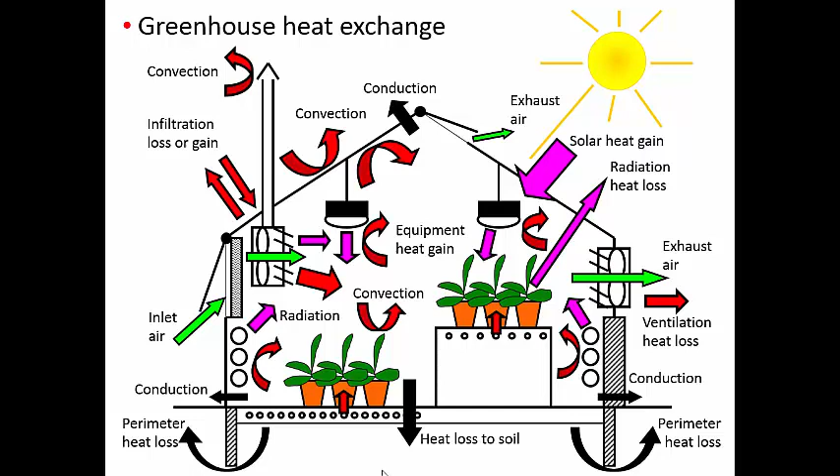So the crux of the matter is, how do we calculate how much heat a greenhouse is losing, because we want to calculate what the capacity should be of the heating system that can make up for that heat loss. We do that through different steps. We have to calculate the structural heat loss, a combination of conduction and convection heat loss, so structural heat loss to the structural elements, as well as air movement happening in and outside the greenhouse that carries heat away from the structure.

We have infiltration heat loss, which is part of air movement, typically through unintended cracks and openings. We saw a lot of those in the greenhouse today, especially around ventilation windows, doors, and things like that. Sometimes we see them in the glazing material, particularly in older greenhouses made of smaller panes of glass that are lapped. Sometimes those panes of glass slip and you get cracks that allow air movement, and with that air movement we can lose heat, so we need to take that into consideration.

The third step is to look at the perimeter heat loss. That's heat loss occurring along the bottom perimeter of a greenhouse, where the warm floor or warm soil is typically in direct contact with the very cold ground soil outside. If we don't have a barrier there, we can lose a fair amount of heat to the outside.

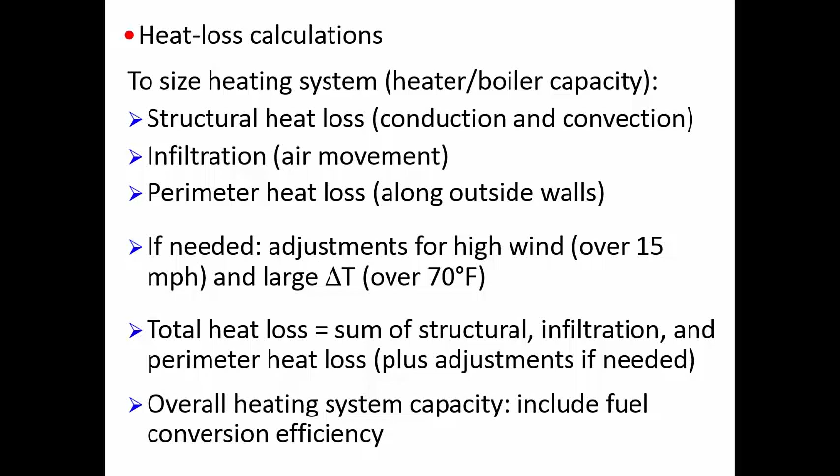The first step is the structural heat loss, what we lose through the structure. That is typically mostly the covering material for a greenhouse, but it could also be some structural components. Here you see the equation for that—it's a fairly simple equation.

We need to know something about the material involved and how well it conducts heat. We call that the heat transfer coefficient, or the U value, which is the inverse of the R value. So if you go to a box store like Lowe's or Home Depot and look for insulation material, you'll typically find an R value. The U value we use for our calculation is nothing more than the inverse of that R value.

We need to know the surface area associated with that particular material, and if we have multiple materials—for example, a greenhouse covered with double poly as well as some areas covered with polycarbonate or another rigid plastic material—we need to calculate the area involved as well as the associated U value for each of those individual areas.

We also need to know something about the temperature difference. We typically use the nighttime set point temperature for the inside temperature, because nighttime is typically when we expect the largest heat loss, since it's coldest outside. It doesn't have to be that way—it could be a very cold day during the daytime—but typically nighttime is the coldest time, so for the inside temperature we pick the nighttime temperature set point.

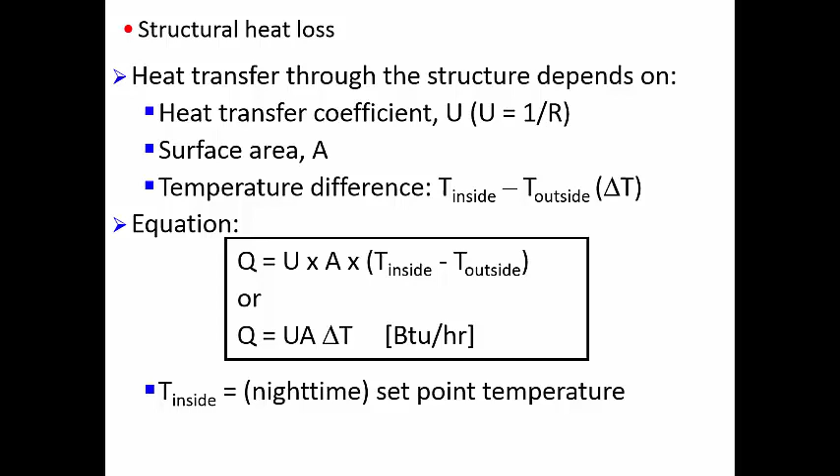Now we set the inside temperature, typically our nighttime temperature set point. The U value is something we can get from materials. Once we know the materials involved for the cladding material and sometimes for the structural components, we can figure out the U value by looking at manufacturer's data or by going to an engineering table.

We can calculate the area of the particular structural component involved by looking at the plans, for example the greenhouse, or by taking measurements. We can figure out what the grower is using for their inside nighttime temperature set point. The only thing we don't know yet is the outdoor temperature.

As I mentioned, we use a sort of compromise called the outdoor design temperature. These are values calculated for many locations across the country. One of the handouts gives you a table for many locations that gives you this 99% design temperature. What that means is that this particular temperature we use for our calculations is only exceeded, or only lower than that temperature, 1% of the time.

So when you take temperature readings for particular locations over a long period of time, you can calculate what that particular temperature should be that is only exceeded 1% of the time. We call it our 99% design temperature.

The reason we do that is if we went with the absolute coldest temperature ever recorded for a particular location, we'd have to design for a very large boiler system, and that capacity would only be used a very limited number of hours over an average year. So we back off a little bit. We say, can we live with a somewhat smaller heating system that is not as expensive and is perhaps used more efficiently than that very large system we'd need for the coldest temperatures ever recorded for this site?

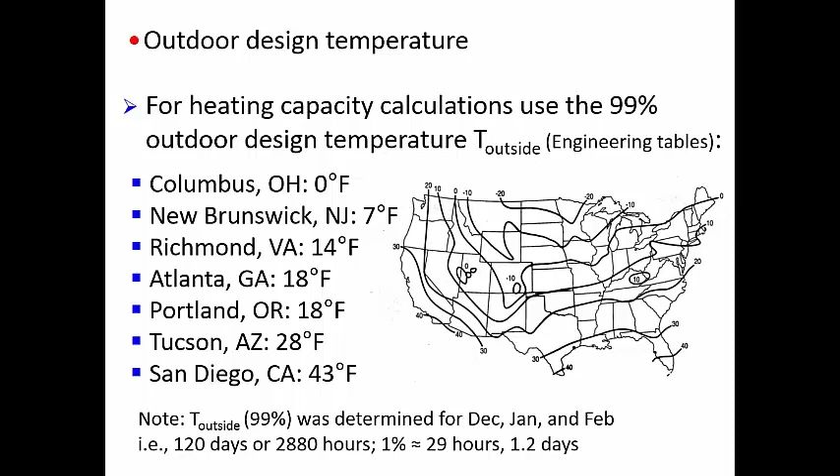The next thing we need to know are the U values. I said you can go to engineering tables or manufacturer's data. In this table you have information about the most common values for the most common materials we use for greenhouse covering materials.

Single or double glass, single or double polyethylene film, double or sometimes triple layer rigid plastic panels, acrylic or polycarbonate - you can see the values. You can also see what happens when you add an energy curtain: the value drops significantly. I want to re-emphasize, and I'll come back to this later, that adding an energy curtain is typically a very smart decision for a grower. I also included some other common building materials to get an idea how that U value compares to these other structural components.

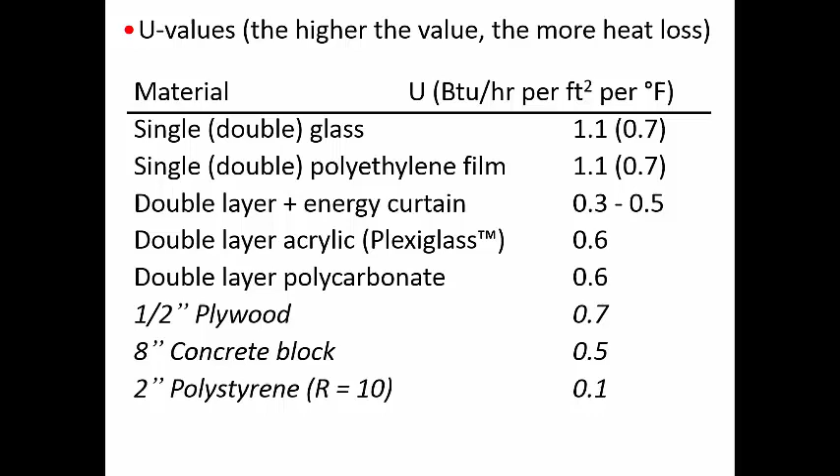So the thing to remember is that if you double the layer, whether glass or polyethylene film, you see the number in parentheses drop significantly, and the lower U value means less heat loss to the outside, so it's a better situation. You can also see what happens when you add the energy curtain - another significant drop in the U value.

So we've dealt with the structural heat loss. The next thing we need to worry about is the infiltration heat loss - air movement through unintended cracks and openings in the structure by which we can lose heat. We need to follow a pretty simple equation that includes the greenhouse volume.

We have to do some calculations or use the design of the greenhouse, the plans for the greenhouse, to come up with a number. We need to look at the table at the bottom of the slide to figure out what, on average, this number of air exchanges is occurring as a result of unintended infiltration. Depending on the glazing material you use, and whether the greenhouse structure is in good or poor condition, you can find numbers here that you can plug into the equation at the top to figure out the infiltration heat loss.

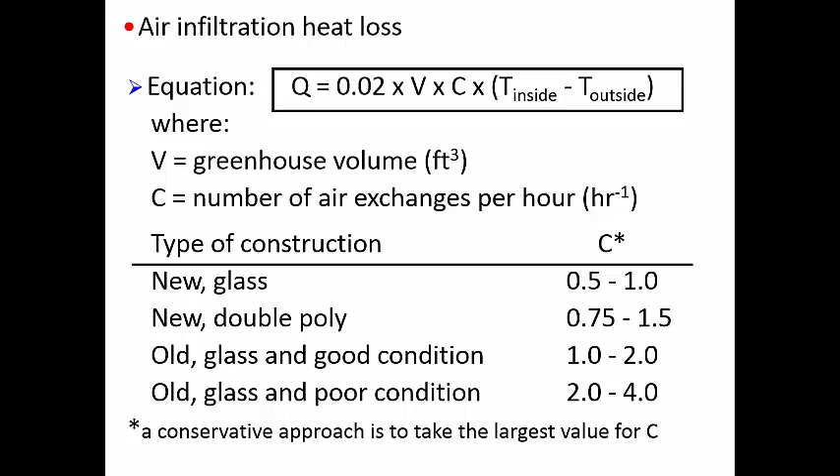When you do the design approach, it's typically a good idea to follow a conservative method, meaning you take a larger value for this number of air exchanges occurring as a result of infiltration through unintended openings. You'll get a slightly larger heat loss that helps you design a more robust system.

So we typically put the louvers on the inside for maximum efficiency. But as you know, these louvers are typically made out of aluminum or fairly flimsy sheet metal, and over time they don't close very well anymore - they get dented and have little openings. So think about the infiltration heat loss that's occurring.

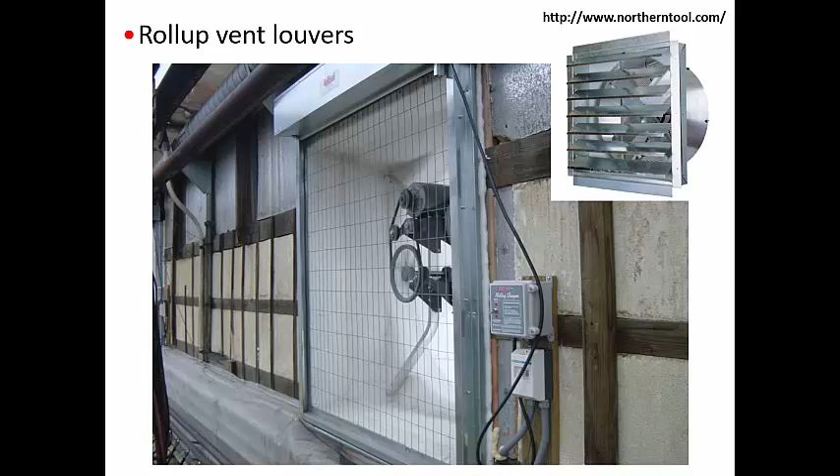One of the questions that people sometimes ask me is, if you are concerned about perimeter heat loss, what about the heat loss to the soil underneath the greenhouse floor? We've done some research on that, and we've pretty much convinced ourselves that if you are located on a site where you have a relatively high groundwater table, which typically means the soil is relatively wet underneath the greenhouse floor, then you have an opportunity for a lot of heat conduction, because water is a very good conductor of heat. So in situations where the soil underneath the greenhouse is relatively wet, you could lose significant amounts of heat to the soil.

In that case, it makes sense to also think about an entire horizontal layer of insulation underneath your floor. But if you are located, for example, on a hillside where you don't worry too much about groundwater, the groundwater table is very low at your site, and you have a well-draining soil, so that the soil underneath the floor is dry, then that soil will not conduct heat very easily. I think you don't have to worry too much about adding an extra horizontal layer of insulation underneath your floor.

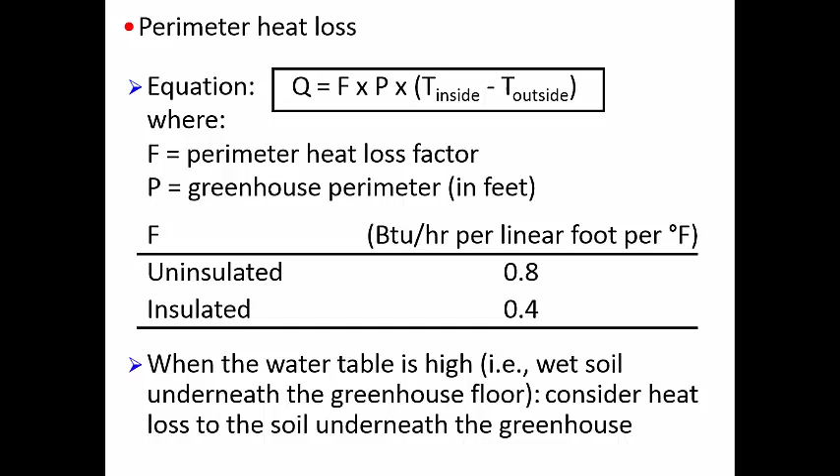In the wintertime, the outside soil is exposed to the outside conditions and could get very cold. So there could be a very easy conduit for heat to be conducted from the inside to the outside, or transported from the inside to the outside. By putting this vertical barrier, we can prevent some of the heat loss, and we reduce the perimeter heat loss of the structure.

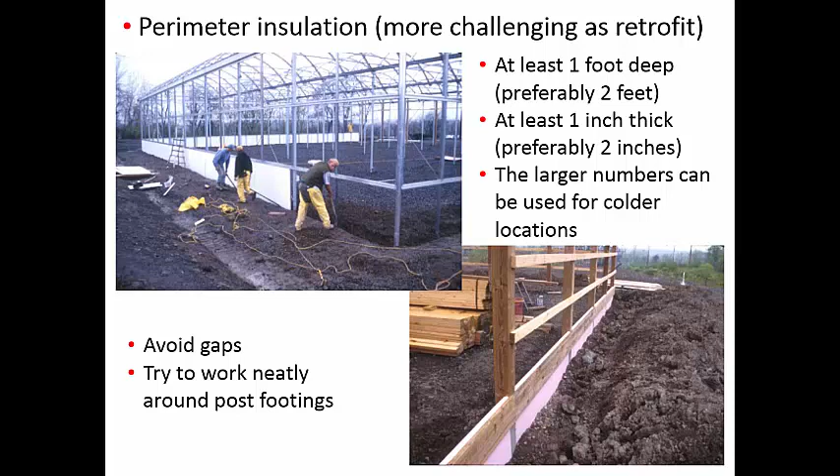Another relatively easy, and I thought innovative, approach for trying to reduce some of the heat loss from the structure was from a grower that I visited in Connecticut a couple of years ago. In the early energy crisis, greenhouses were, of course, hard hit by the high energy costs. This was in the 70s. At that time, all kinds of research was going on to try to figure out how we could insulate greenhouses. What they did at that time was recommend that people, particularly on the north wall, put some solid insulation to try to reduce heat loss.

But when they did that, they discovered that as a result, a significant amount of light was also blocked off. Think about cloudy weather like today, where light is mostly diffused, coming from multiple directions, not just from the south or from the direction of the sun, but also from the north side, because of all the bouncing around of light in the atmosphere and in the clouds before it reaches the surface. It is important to also have light coming through your north wall.

So this grower married these two ideas and said, okay, I want to insulate my north wall, but I also want to make sure I get enough light in. So they used bubble wrap material to insulate the north-facing wall of the greenhouse to try to reduce heat loss. I thought it was an interesting idea.

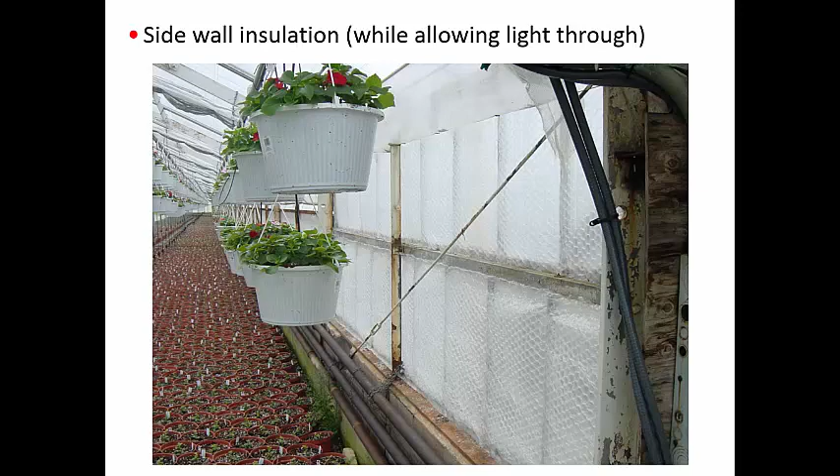This average wind speed is something you may be able to get by contacting the local weather station, or again by looking at an engineering table for a particular site that tells you what the average wind speed for that location will be.

It's probably easiest to go directly to the example. Here the temperature difference is actually 80 degrees, and 70 was the cutoff, so it's higher than that. For every 5 degrees above 70, we need to add a factor of 0.08. We are 10 degrees above 70 when we have a temperature difference of 80, so the factor becomes 1.16.

It's a multiplication factor. Same for this example where we had a wind velocity of 25 miles per hour. For every 5 miles per hour over 15 miles per hour, we have another conversion factor component. That adds up to 25 miles per hour, which is 10 miles over the limit, so you have to double the factor. You end up with a number of 1.08. If you add them together, you get a factor of 1.24.

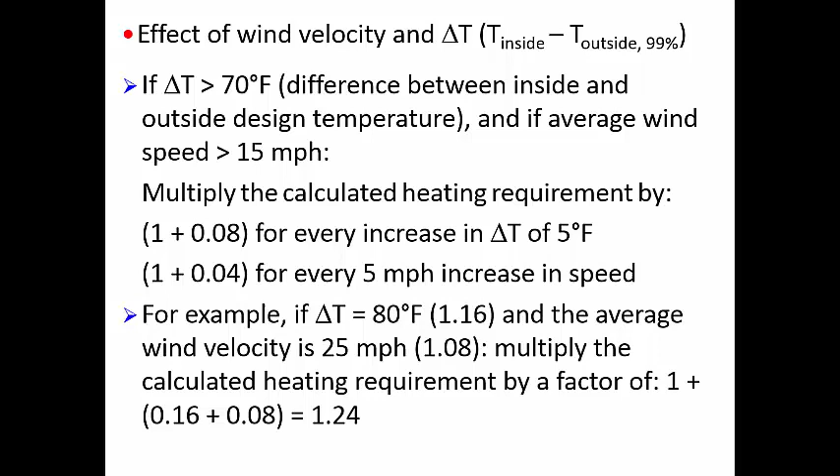This is the multiplication factor that you have to use for your overall heat loss calculation to accommodate the situation of a very large temperature difference as well as a high wind condition. So you do all the calculation I showed you before, then figure out this multiplication factor, multiply your answer by it, and you get a bigger number that you then use for figuring out your boiler capacity, or your heater capacity.

Quick question on that: does that assume that the greenhouse is sealed up well? Yes.

You can see that for electricity, the conversion efficiency is very high. If you use electricity for heating, pretty much all the electric energy you provide is converted into heat energy, with very little loss. So from that point of view, using electricity is a very good thing to do. But of course, electricity is a very expensive way of heating a structure.

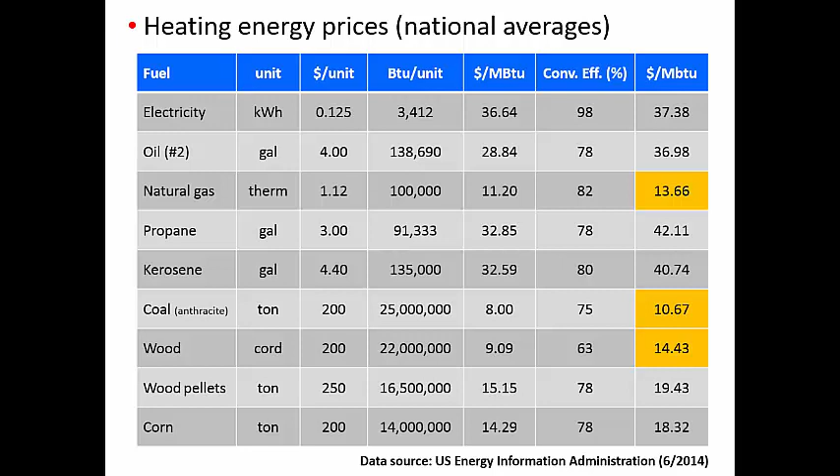Now, some of you may pick a bone with me and say, well, my gas heater is a lot more efficient than 82%, and that's fine. You can use your own conversion efficiency numbers for your own system. That 82% I think is a reasonable number for an average gas-fired heating system. So depending on your own numbers and your own prices, you can do the same kind of calculation to figure out for your situation what these numbers will be.

So next I wanted to review some different heating systems. We've seen unit heaters, so I think you all know what they are, what they look like, how they work. It's basically a heat exchanger with a fan, and we provide fuel. It could be gas, could be oil, it could be something else that is combusted inside, and then we blow warm air through the unit, and the heat exchanger exchanges the combustion heat with the air that we blow through the system.

Sometimes we are concerned about byproducts that are formed through the combustion process, and in that case we have what we call separated combustion systems, where we bring in outside air for the combustion process and we remove any combusted air or combustion products through a different stack system to the outside, so that the inside air is never mixed with the combustion process. There's no release of any combustion gases inside the greenhouse.

Sometimes we do want combustion processes inside the greenhouse when we want to release CO2 in the greenhouse for added photosynthesis, added growth. We also have these type of furnaces, but just like unit heaters, furnaces have a particular challenge in distributing that air uniformly throughout the structure.

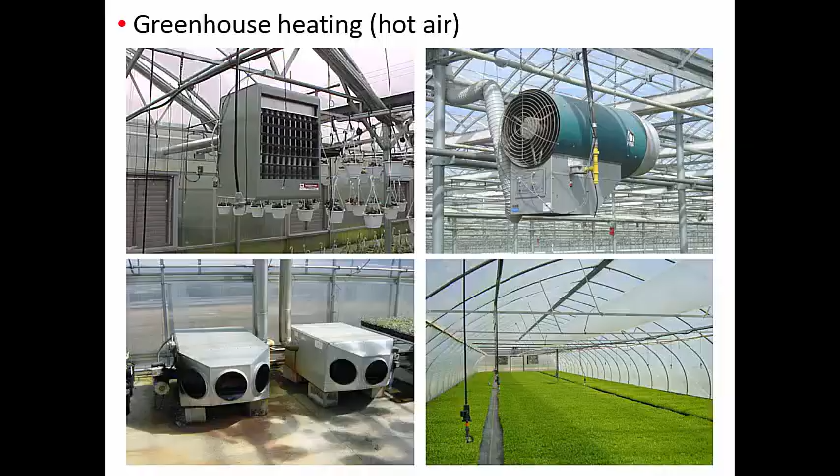As I alluded to, we have different types of unit heaters. This is a listing of the most common types.

We have units that we call gravity vented, which are buoyancy vented systems. We make use of the fact that warm air is less dense and rises, so we make use of that natural process to try to draw the exhaust gases out of the structure.

We have power vented unit heaters that use a small fan to try to draw air out of the combustion chamber and to the outside of the greenhouse, to make sure that process is done properly and we don't end up with combustion gases inside the structure.

We have, as I already mentioned, separated combustion units where the intake as well as the exhaust from the combustion process are completely separated and are channeled through a different duct system so that we don't have any air mixing between the inside and the combustion gases for the process.

We can have something that we call condensing systems, and I'm going to come back to this later. If you do a combustion process well, you should end up with only carbon dioxide and water vapor as the end products. But to get water vapor, we have to expend energy. The heat generated in the combustion process, some of that heat is used to make water vapor. And if we condense that water vapor back down, we can extract some of that energy again and increase the overall efficiency of our process.

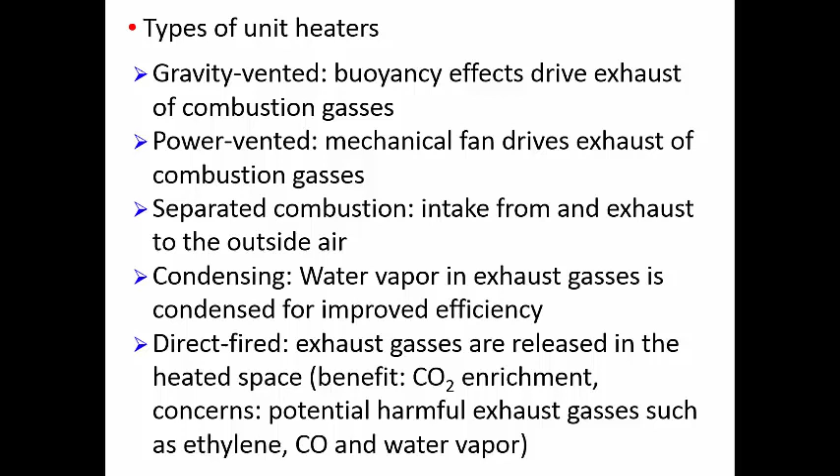But we have to be concerned that the system is properly adjusted so we don't get any potentially harmful byproducts of the combustion process released into the house. For example, ethylene and carbon monoxide - ethylene particularly for plants and carbon monoxide for people - can be an issue, as well as water vapor. If you produce too much water vapor, you can increase humidity inside the house and cause all kinds of disease issues for plant material. So that's also a concern. This is possible, but you have to know what you're doing. You have to have properly adjusted equipment that can make sure none of these harmful byproducts are actually being released inside the house.

Here's some examples of a hot water system. We saw some of these components today. We typically have a boiler - this was a gas-fired boiler with a large plumbing system with lots of pumps and mixing valves. Typically, one system provides hot water to multiple zones or regions in the greenhouse that can be operated at different settings. Here you see some of the pipes, in this case along the perimeter.

There's typically also pipes overhead. We can have different types of pipe - these are finned pipes, these are smooth pipes. We can also put pipes on the floor. You've seen pipes today that were installed in benches, but all of these systems use water to move energy, heat energy from the boiler system to the ultimate greenhouse location where it's needed.

Okay, what's your diameter of that finned pipe right there? This is probably 1.5 inches, maybe an inch, something like that. Of the pipe, that's what you're talking about? Yeah, so that's under bench? This is under bench or around the perimeter.

The number of fins typically tells you what it's used for. When we look at the greenhouse today, we saw only 2 fins, so there's less convective radiation, less convective energy coming from the system. These were used for perimeter and overhead heating, so you want more energy coming out of that system, so you have more fins.

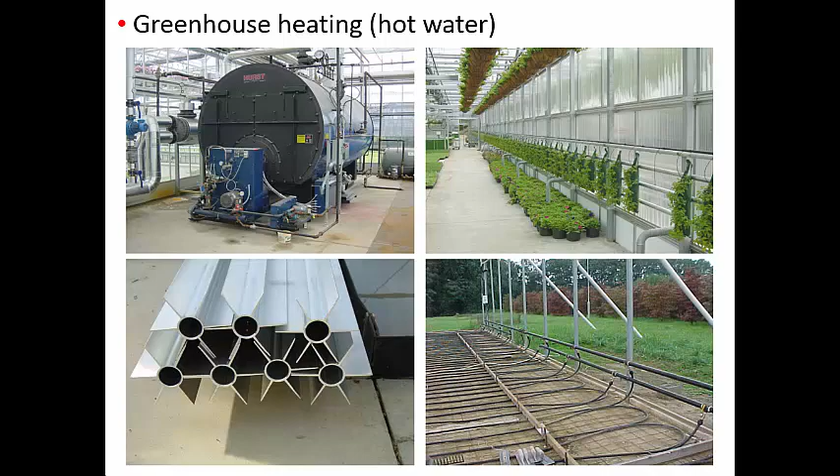An array of different heating designs are used both for hot water and for hot air. You can see several of them here. We have overhead and perimeter heat, we have bench heating, we have intracanopy heating - pipes placed between rows of plants, typically seen in tomato, cucumber, or pepper houses, where the pipes are not only used for heating but also as a rail system for small carts that we can use to drive between the rows of plants. We have floor heating, could be directly in the soil, could be in a concrete floor, could be a mix of different heating systems.

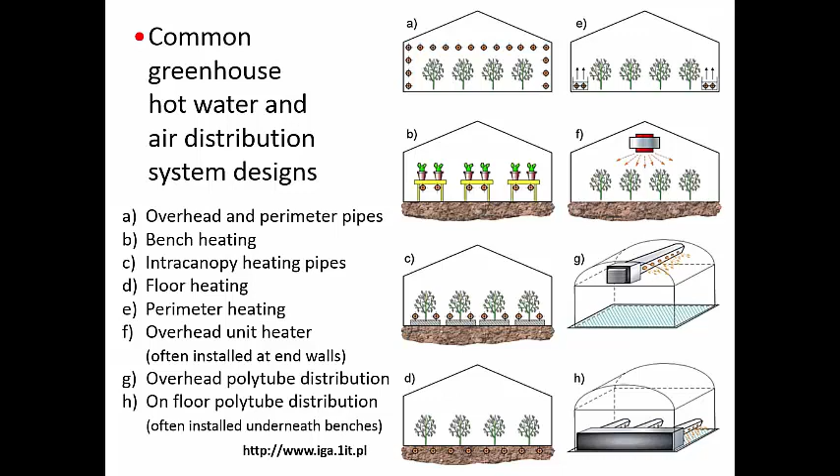We have perimeter heating that is using fans to distribute that air. We have these overhead unit heaters - they could be horizontal, could be vertical, as in this case. We talked about the poly tubes, and the poly tubes could be overhead as well as underneath the benches or on the floor. So a variety of different designs are used, depending on the crops that you're growing and typically on grower preferences.

One of the questions growers often ask me is, if I had a choice, what would I recommend? And if I had a choice, I would typically opt for hot water systems, particularly when I was concerned about uniformity - it was mentioned today, as well as I alluded to it earlier. Hot water systems provide a much better means of distributing that heat more uniformly compared to hot air systems. For crops where uniformity is really key, for example growing seedlings that are only in the greenhouse for a very short time, that you want to grow at the same rate because you want to harvest them at the same time, uniformity is important, so a hot water system is the way to go.

But hot water systems are more expensive than air systems, and that is typically a major concern for many growers. So I do have a lot of growers who have hot air systems because they are concerned about the cost of hot water systems. And if you do have a hot water system, you should not forget that you need water treatment. Often we use dissimilar metals in hot water systems - we have perhaps aluminum, steel, we may have copper or brass for various components of the system, for mixing valves, for pumps, as well as the regular pipes that we use.

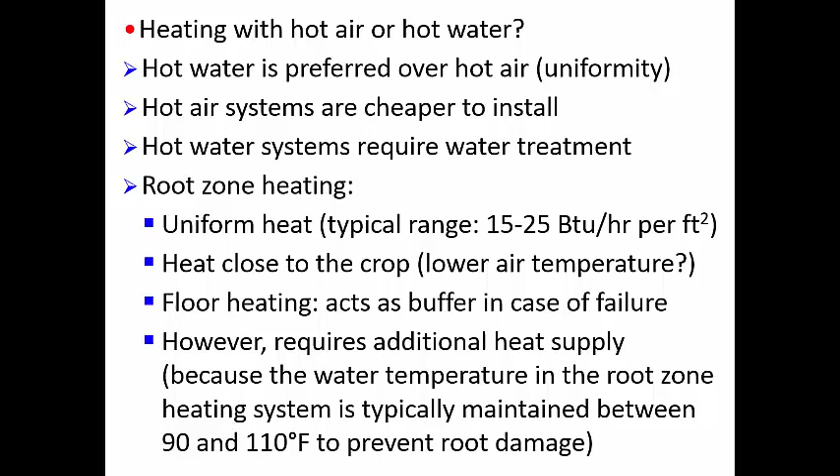As I mentioned, you need some additional heating capacity because we can't crank up the heat very high in root zone heating systems, since the crop is so close.

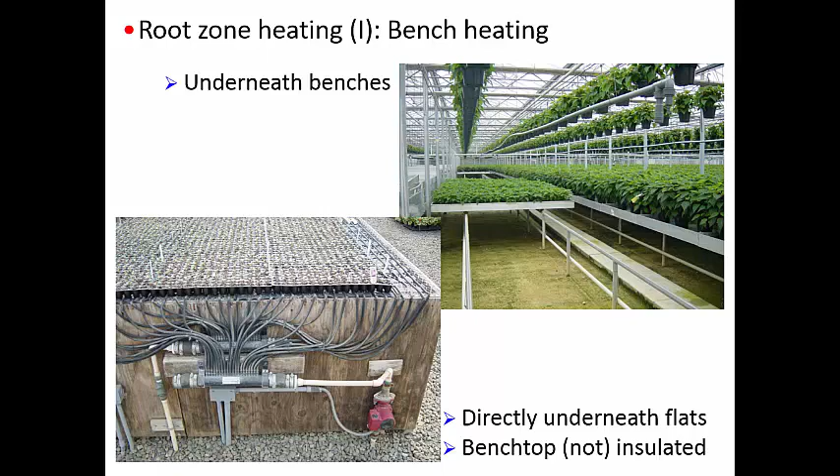You can also see the rolling benches here, and underneath the benches, these white pipes are the heating pipes that provide hot water, heating energy to the crop. Notice the distance here—this pipe is probably carrying a little bit higher water temperature, so it's placed some distance away from the bottom of the table, so we don't get into a situation where the root system is heated too much.

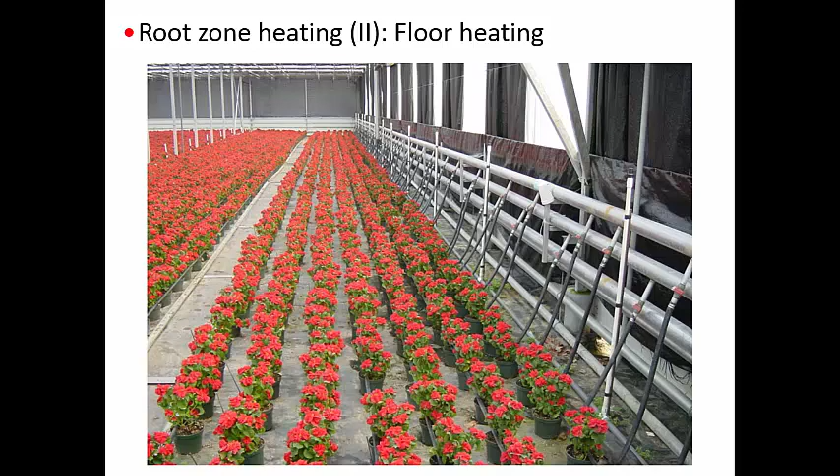What you need to do in order for the system to transport that heat being released into the floor to the crop is keep this relatively moist. So keeping it a relatively wet environment - that's where the landscape fabric helps keep that layer in which the heating pipes are embedded relatively moist, because moist soil is a good conductor for heat.

You can also install a heating system directly in a concrete floor. This is a situation where we have a heated floor that is also the irrigation system - a solid concrete slab with heating pipes embedded in it. Before we poured this concrete floor, in this research greenhouse, we designed the system so there's a plumbing system underneath the concrete that we laid out carefully. After the concrete was poured, we drilled holes directly through it into our plastic pipe plumbing system, which is connected to an underground storage tank where we maintain our nutrient solution.

Then we can pump for an irrigation cycle, pumping the water up to the floor. The plants sit directly on the floor - you see here a rubber bumper around the crop to maintain the nutrient solution in the growing area. At the end of the cycle, which lasts a few minutes, the pump is shut off, and because the floor is sloped so it drains well, all the water drains back into the underground tank for the next irrigation cycle.

So that's basically just a big ebb and flow floor - the whole thing's like a big hydro table.

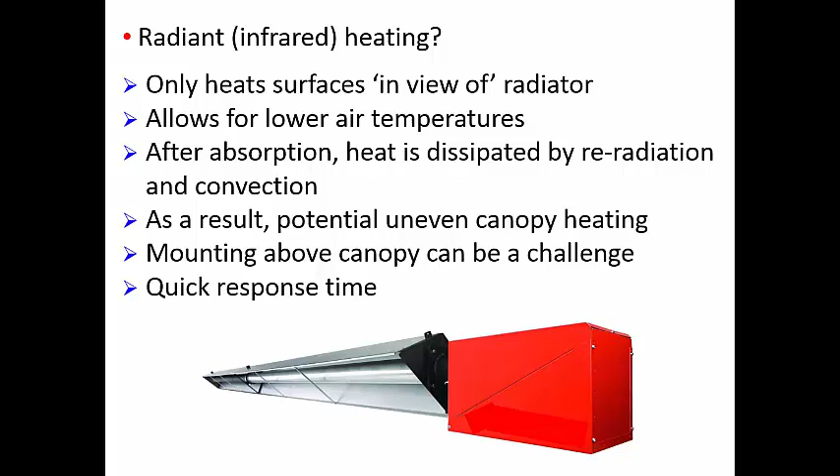Also, in lower greenhouse ranges, in the older parts of the greenhouse operation we saw today, where the gutter height was relatively low, you have a challenge mounting these systems high enough to cover a large enough area, because there's just not enough room in the structure to put them a certain distance away from the plants. So in older greenhouses this is a challenge for mounting these systems to cover larger areas. But the response time is very quick—you turn them on and the radiation starts instantaneously, so you get instantaneous heating, which can be a benefit.

Could you mount a system like that under a bench, or a very low-level system for root heating, or is that not practical?

Yeah, the question is could you mount these radiant heating systems underneath the bench? I assume you can, and it might work. One challenge I see is stuff falling on it, particularly water, which probably creates all kinds of issues. So I don't think it's a very practical idea, but theoretically I think it would work.

Other heating systems—we talked a little about wood today, but there are other biomass sources. We've seen growers use corn and switchgrass. Miscanthus was mentioned today, and maybe other grasses that we could use.

Some growers, depending on their location and the geology of the site, can make use of geothermal sources—hot water sources, typically a result of volcanic activity or geological formations deep underground. I'm talking now about miles underground, typically.

We can also make use of ground source heat systems. Typically we use heat pumps, systems very similar to a refrigerator, except you can run them in the opposite direction—you can run the refrigerant in reverse. That means in addition to cooling a space, you can also use that same system to heat something, just by reversing the flow of the refrigerant inside it.

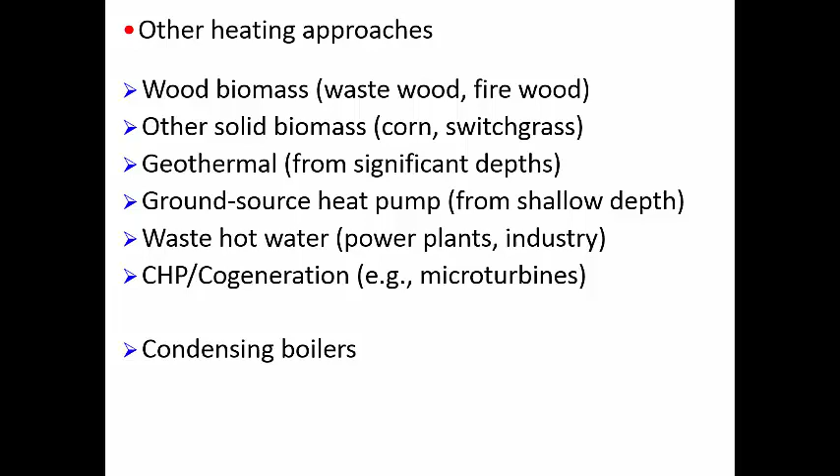The trick with these systems, and this is why this storage component becomes so critical, is that you want to run these units at their maximum efficiency as much as possible. If you need a little bit of heat, in the old approach, you would have to start up this large boiler system and produce that little bit of heat, and then shut the boiler down again until you had the next request for heat.

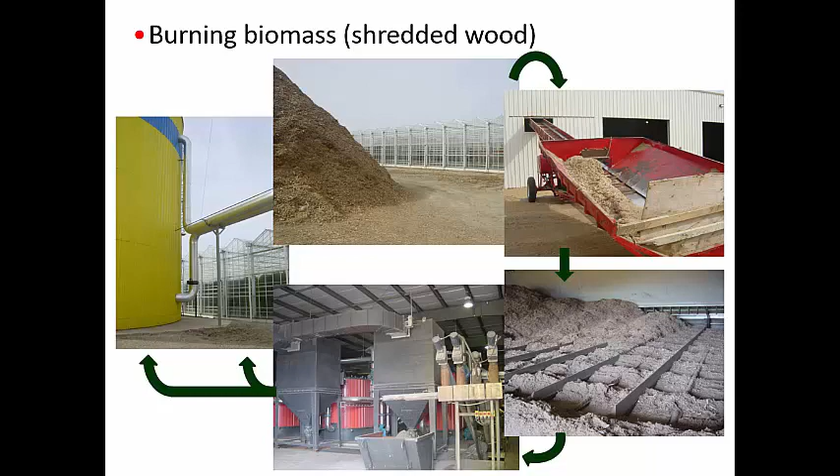In New Jersey, we have a grower who is using wood pellets, so it's the same idea. Sawdust, in this case, is formed into pellets that are shipped on site by tractor trailers and then stored in these large silos and augered in with a simple auger system into the boiler system.

So yes, it's an extra step. You have to process your wood and make these pellets, but once you have these pellets, it becomes a fairly easy, manageable system. And once you figure out how to work with these silos and get past some of the challenges of running an auger system, it's a very easy way of getting your fuel source to your boiler system.

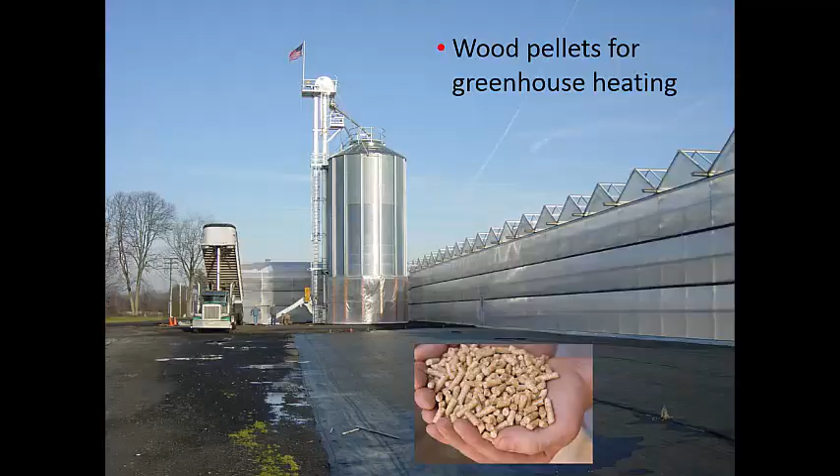So if a lot of heat is needed, a lot of pellets are pushed in. If little heat is needed, only a small amount of pellets is pushed in.

The only challenge for us in New Jersey is that we are one of the states that is not in compliance with the Clean Air Act, and that means our Department of Environmental Protection is very keen on limiting additional, particularly particulate matter emitters in our state.

So when our grower switched, in this case he was using fuel oil, that was one of his reasons why he wanted to go with a different fuel source. He switched from fuel oil to a wood source. The DEP was all over him because they were concerned about additional particulate emissions because of the fact that we are not in compliance with the Clean Air Act.

And so we had to install a fairly elaborate system with cyclone technology to try to capture all the particulate matter before any of the exhaust gases were released to the outside. So there were additional costs in our case involved with this particular heating system.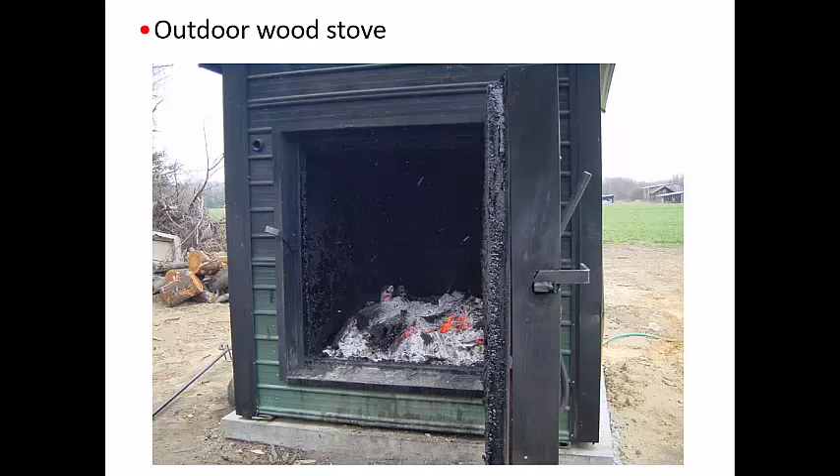There are larger systems that allow entire pallets to be driven in with a forklift into the combustion chamber. So growers with larger systems can pre-stack wood on pallets, and all they have to do is get a forklift, open the door, drive another pallet into the combustion chamber, and close the door—they're done. So there are ways of trying to reduce the labor and effort needed to keep these systems going.

In the summertime, you can cool down your space by extracting heat energy and bringing it to the soil. In the wintertime, when the soil temperature is typically warmer than the outside temperature, you can extract energy from the soil and bring it into the space you want to heat. In this case, additional heating capacity may be needed in case the system itself can't provide everything required, so you have an additional water heater that helps out, for example for floor heating or other water heating purposes.

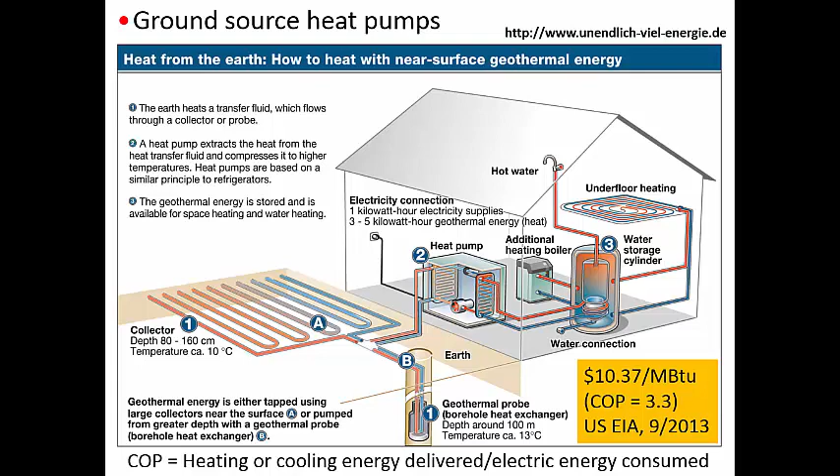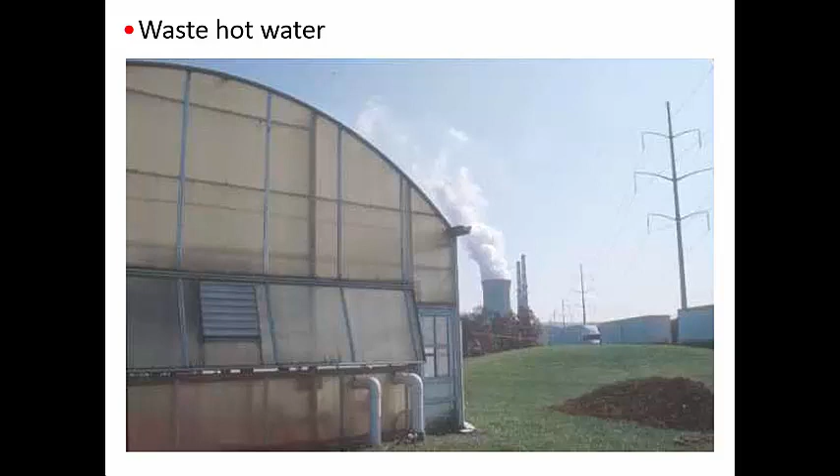Theoretically, this is a very nice system. After you install the plumbing and the heat exchanger in the greenhouse, your heat source is basically for free. But there's one significant caveat: power plants need maintenance, and they're typically down maybe a month every year. It's not always in the summertime—it could be in the wintertime that they're down for maintenance. So you have to have a backup heating system when going this route. You cannot always 100% rely on your outside energy source to be available. You still need your own heating system to provide enough heat energy.

We have in New Jersey, as part of the university research system, a 1 acre greenhouse at a landfill site, about 45 minutes south of where I'm at in New Brunswick, New Jersey. The university made an agreement with the county: the county paid for the greenhouse facility, but the university operates it for a nominal fee. Since we're close to a landfill, and part of that landfill is finished, covered and capped, they are extracting methane gas out of that portion, and we use that landfill gas to convert it in this combined heat and power system using a microturbine, which is essentially a stationary jet engine.

We're using that same technology to generate electricity that we can use on site, primarily for our supplemental lighting system, which requires lots of energy. Any excess electricity we generate, we can export to the local power grid. We have a special agreement with the power company—it's not a net metering agreement, it's an agreement that allows us to export whatever excess we have, whenever we have it. So we're generating electricity we can use on site, or any excess can be exported.

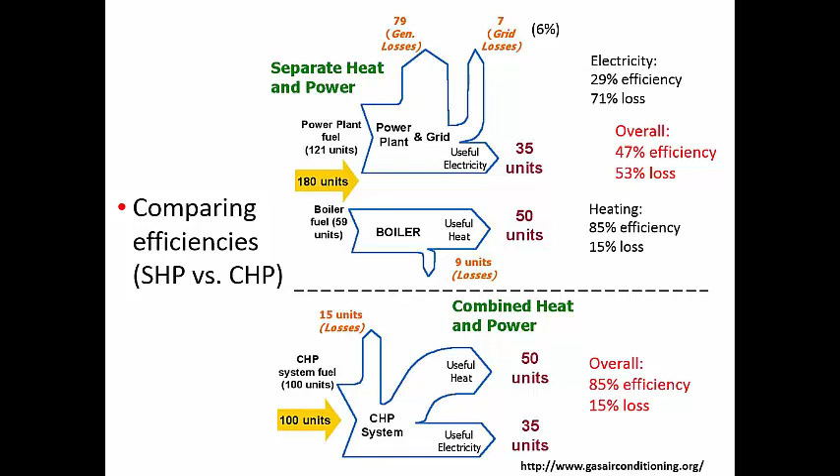So I think combined heat and power is certainly something that growers should look into, particularly growers that are thinking about new installations or scaling up their current systems.

One of the growers in California has taken this even a step further. They are using gas engines, so they don't use landfill gas, but they use natural gas. They generate electricity like we were doing, they capture the waste heat, but they also clean the exhaust gases to the point where they have more or less pure CO2 available to them for enriching the greenhouse environment, for boosting plant production.

And then finally, they also condense some of the water vapor that comes out of the system, and then have a certain amount of water that they can use for irrigation purposes. So they have 4 different components that they extract out of their energy system.

That condensed water has no metals in it or anything after it's been condensed from that fuel? Correct, as far as I know, it doesn't have any metals in it. Well, I was just wondering, back to that combined heat and power you mentioned before, with those siloxanes in it, have y'all tried evaporating that with those two refrigeration units?

So the amount is very small. If we run our system for an entire day, which is 250 kilowatt nominal output, it would generate 5 or 6 gallons of this waste product. So it's a very small amount that doing anything else with would add significant cost for that small volume you create. Yeah, so that's probably not economic.

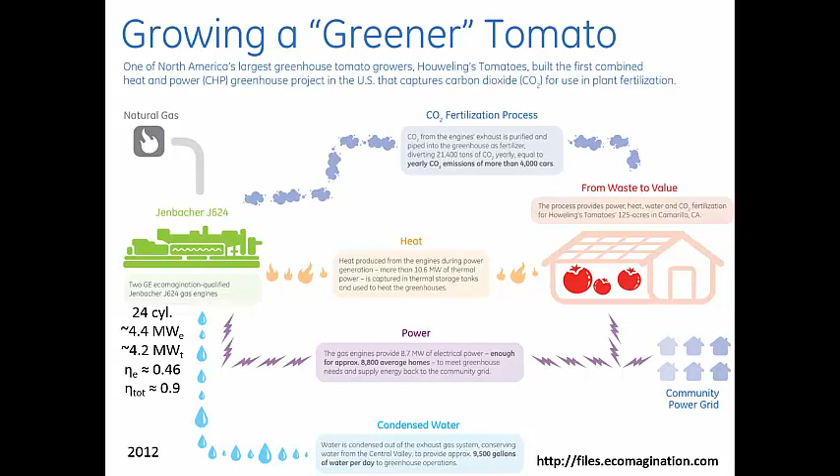Okay, I mentioned this several times. Condensing boilers, condensing heaters can be very, very efficient. What you're trying to do is recapture the energy that was needed to generate water vapor in the combustion process. By condensing the water vapor back to water, you can extract some of that energy, and typically we use that energy to preheat the return water before it gets back into the boiler to be heated again.

So, in order to do that, water is involved, and therefore many times we make boiler components out of stainless steel because we don't want them to rust out prematurely. But if you do that, as I mentioned, you can get to much higher overall efficiencies.

Another advantage is that these systems can be low mass, so low physical mass, but also low water mass, which can be very useful for greenhouse operations. They can be operated on demand, so you don't have to have a boiler running in standby mode to anticipate a request for heat. These systems can be shut down when you don't need heat and started when you need heat, and they can almost instantaneously provide that heat. They also have a relatively small footprint, which could be important under some conditions.

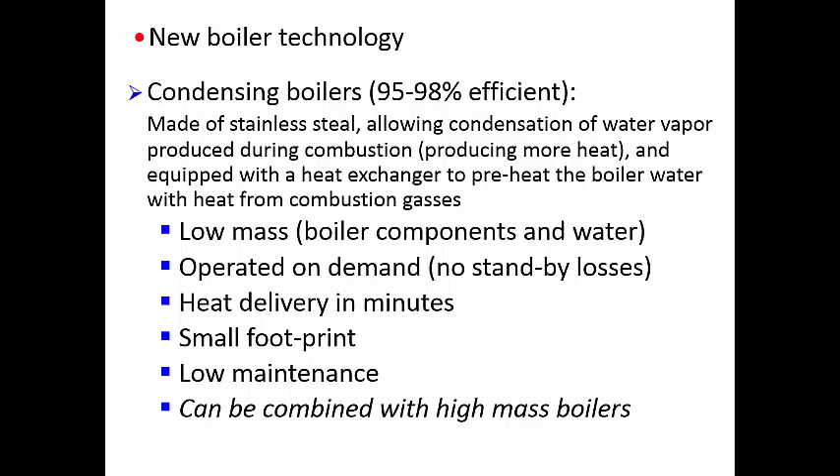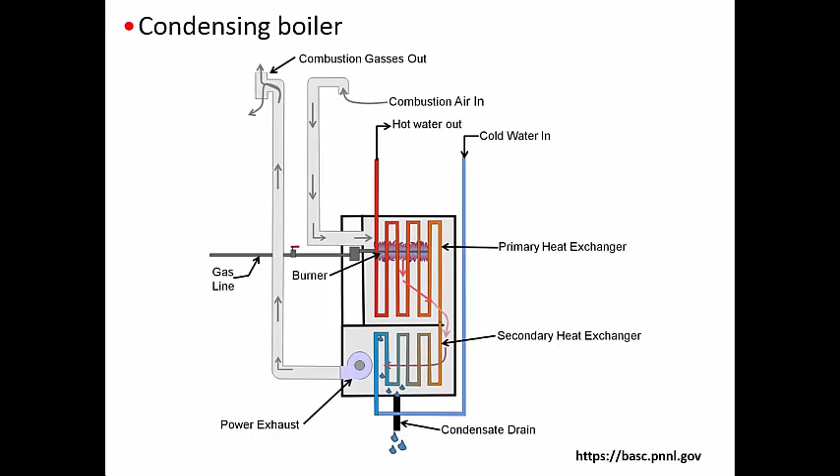So in summary, trying to wrap this up, here are some suggestions for what I think you need to look for in terms of energy savings for greenhouses. I think the first thing every grower needs to start with is to look at conservation measures. It's always cheaper, I believe, to start with conservation than to think about retrofitting or installing new systems, whether that's an alternative energy system or another new approach. Looking at conservation first is the way to go.

The next thing I would do is look at energy curtains or shade curtains. Typically these are a single curtain used for two different purposes, hence the energy/shade indication, so we make a compromise. Ideally, we would have two curtains, one specifically designed as an energy retention curtain and one optimized for shading. But that would mean two curtain system installations, perhaps double the cost. So in many cases growers compromise and use one curtain for two purposes. Even in those cases, it's not inconceivable for growers to save 30% on the energy bill when installed properly. So the payback time for an energy curtain is typically very rapid, sometimes within one season.

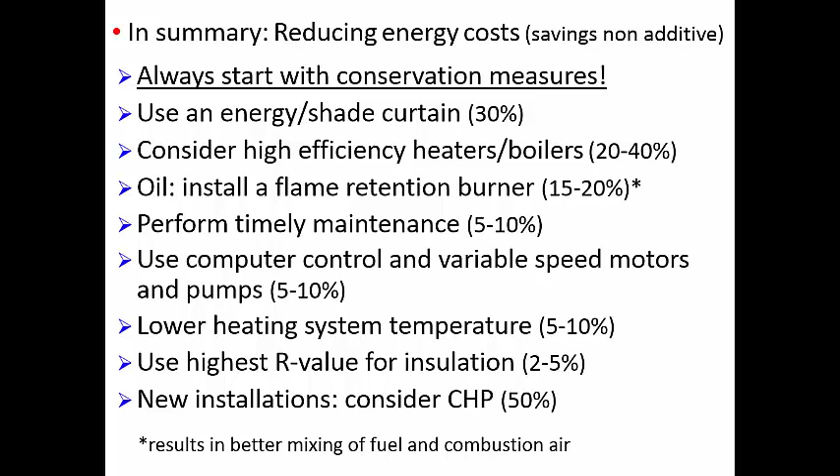And for new installations, I think, as I tried to explain, considering combined heat and power or cogeneration systems is a very smart approach. Doctor, with cogen, real quick, as we were discussing when we were looking at the boiler, the propane boiler over there, isn't it the timing though with greenhouses? I mean, the time you need your heat is typically not when you need all of your electricity.

So are you saying use your cogeneration on on-peak times to generate power then? Or, you know what I mean? Where's the balance of the system? So the question is, how do you balance combined heat and power systems when you produce electricity and heat at the same time, but you may not need them at the same time in your operation?

And that's a very good question. I think it requires a management strategy. It requires you to understand what your system is capable of, what your needs are, and perhaps, as I alluded to earlier, you may have to incorporate a storage system where you can store some energy in the form of hot water over a period of time that allows you to better manage your system to reach those higher efficiencies that are possible. So it is not something that you just install and push a button and walk away from. It's something that you need to manage.

You need to understand what's going on, and there are programs available and there are specialists available that know more of the ins and outs of these systems that you probably want to consult with to really understand how you can optimize the use of your system.

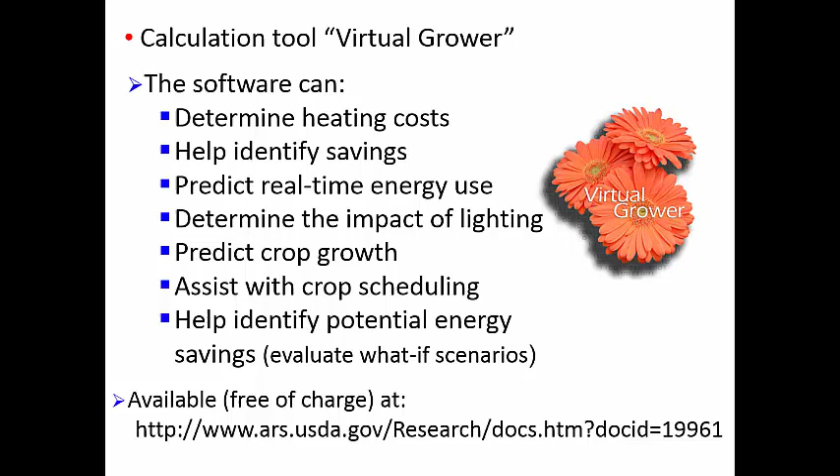What happens if I install an energy curtain? What happens if I install a higher insulation value, or use a different fuel source, or use a different covering material? What is the impact of that change on the bottom line for my operation? But you'll hear more about that tomorrow.

Any questions for AJ?

I won't be here for the virtual grower thing tomorrow. I do have one question I've been wondering forever though. In regard to the perimeter insulation, it says either do between 1 and 2 inches and also 1 to 2 feet deep. And that seems to be common that I run into that. But there's a pretty big cost difference between the two, going from say a 1-inch insulation to a 2, and also it's double the material if you go 1 or 2 feet deep. So I'm just wondering, if I'm comparing a 2 foot and a 2 inch to a 1 foot deep and a 1 inch, how can I better make a decision about that as far as what's being recommended?

So what you're really asking is if the cost I have to spend to install these systems is worth the payback I'm getting in terms of energy savings. And I think you'd probably have to do a little bit more sophisticated analysis and look at it over a longer period of time to really narrow down an answer to the question. In other words, I can't really give you a very good answer right now. It depends on the particular installation. It depends on the management of the greenhouse operation in order to come up with an answer - how much am I really saving?